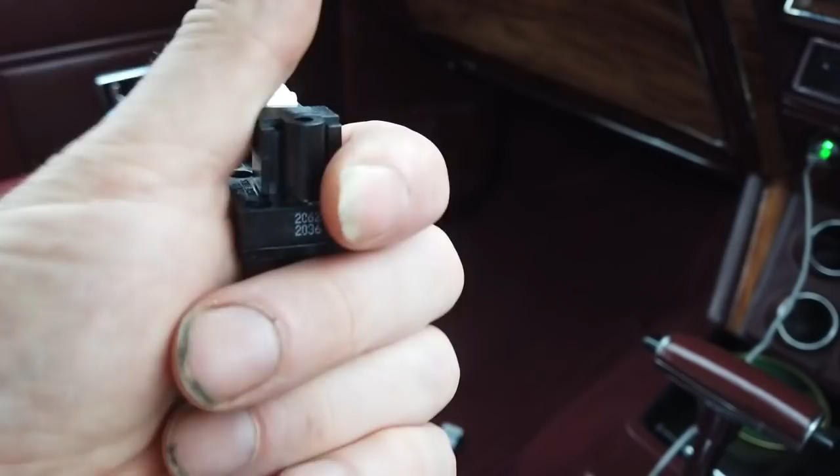This one's adjustable from 6 to 22, I think. Now, the engine should pull about 14 - I think these are HG, Mercury figures I'm giving you, inches of Mercury. Normally it's done in HG, although you can have PSI, can't you, but PSI is normally positive. Anyway, HG - we're hoping that this range, because you can get different ranges of switch, I'm hoping this is the right range, from 6 HG up to 22.

Now, I did put Bramble on the Crypton vacuum gauge, and it showed 15 at idle. So you've got to work out the right point to adjust this little Allen key here on the vac switch, to be at the right position whereby when I'm lightly coasting at about half throttle at 3000 RPM under not much load, this is active. And then as soon as I gas it, or the car wants to drop a gear because the loading's changed, in theory the vacuum drops out. It should follow the tracks of the modulator.

What the modulator does, this should also do, because they're going to be on the same vac line. So what you've got to think about is the modulator - when I boot the car, the modulator senses a drop in vacuum and drops the gear accordingly. This wants to be doing a similar idea. We need to find the sweet spot where this will be happiest without any cycling off and on at cruise positions. Now, I mentioned earlier this is connected to a time switch as well, which I'd already incorporated into the electronics behind the dash of the car.

This is how it works. Okay, I'm going to talk you through how it works as we drive. There's a lock-up light here on the T selector, and a green to go light there. That just tells me it's receiving the microswitch signal, because there's an inhibitor microswitch here. Lockup won't work unless it's in drive. Green says it's in drive. Red comes on when the lockup's completed its circuit - that's when the speed pulses have been counted enough, it's happy that it's in drive and your foot's not on the brake, that red light will come on.

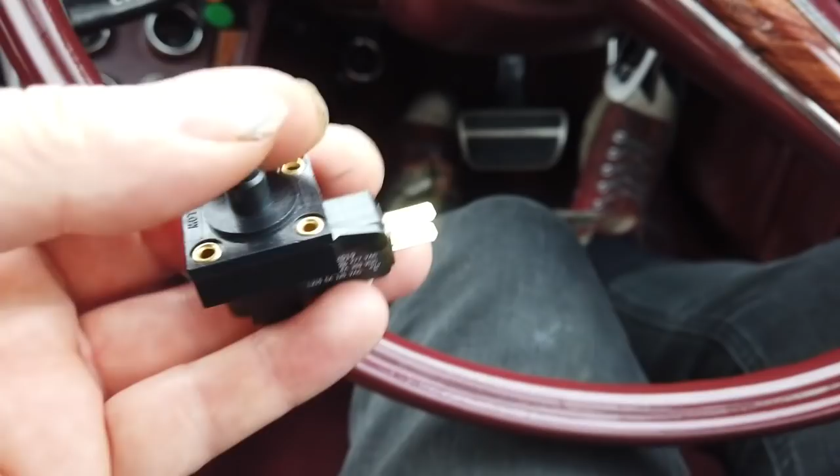If I boot it, the vac will drop momentarily. It does actually come back up as well, by the way. You've got to remember this. But it'll drop, and the lockup will come out, because it'll fire that delay circuit. And that's how we're doing it.

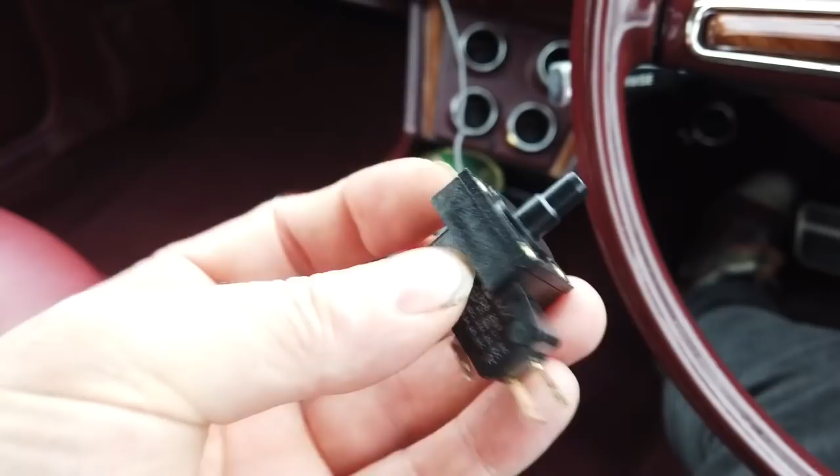I just hope that this is the right one. I'm going to suck the tube end here and just see if I can click it. I don't know how much HG we can suck, but I better ask Debbie from Dallas about that. But I'm hoping it's the right range. I think that it is. At the moment, I'm able to operate that by drawing on it with my mouth. So let's hope it's right. We'll go back and fit that now. Back to base to fit that.

So I've took you out on the road to show you that the power's back in the car. We're not pinking. And it's to answer a lot of those questions which were raised on the last video about induction noise. I'm thinking perhaps the induction noise is something to do with the fact it's so well insulated in this cabin compared to the other cars, because you'll notice it is exceptionally quiet when we're driving.

All I've got to do now is... the phone is locking in and out. I've got a Nokia C1 phone here. Look at this. Great phone. That's all I need in life. I don't want any more. Don't want no smartphones. Don't want any of this scrubbing screens. I just want rough, ready, good to go. This does pictures - there's my cats. This does texts. It does phone calls. It's got a camera on it. I don't want any more. I don't want some smart-ass thing. Now, there's a downside to it.

This one's got a fault on it, but I'll get another one. The Bluetooth range on it - probably the Bluetooth transmitter's damaged - so it doesn't pick up my hands-free car kit. But if I put it next to the Bluetooth module in the glove box, it'll pick it up and you'll hear my Parrot Bluetooth lock onto it. So that Nokia phone is great, but that particular one's got a little Bluetooth fault. In fact, when I'm using my Bluetooth headphones, there it goes, it's got it. They don't lock on either. It's not the car kit.

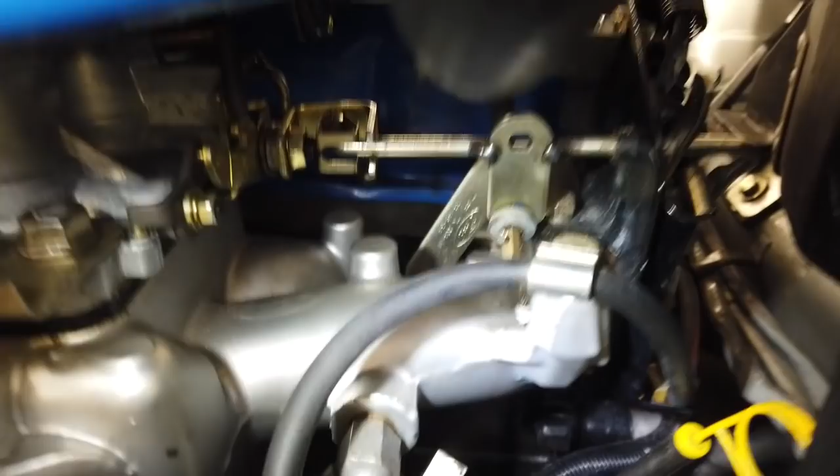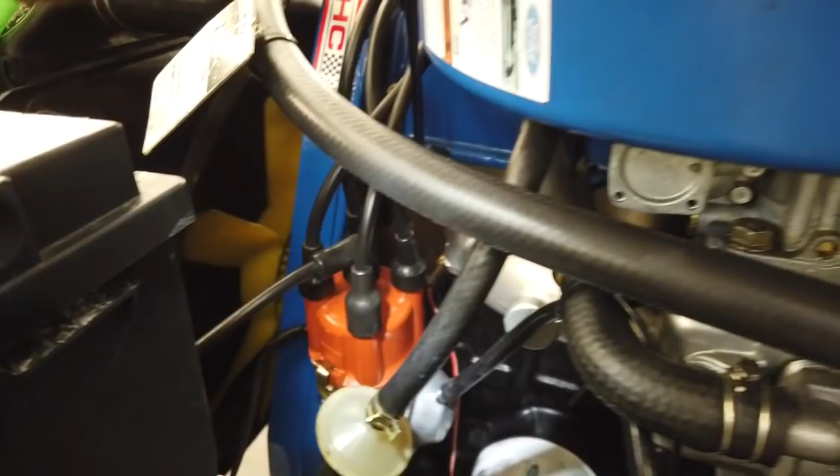Okay, we're back at base after that trip out to pick up the Vac Switch and test some of the improvements we've been doing. A vac line is now attached to the inlet manifold T or Y adapter—it's a triple adapter actually, feeding the brake servo, the vac modulator for the gearbox, and the advance vac to the distributor. So I've got 3 things connected now. As I said earlier, the distributor didn't used to be connected to that. I've blanked off the pickup on the ported side on the carburettor, so it's picking up off this T-piece now—you can just see there, it's a triple T-piece. The pipe now comes over the wing onto the floor, then up onto the bench here, and this on the bench now is what we've got.

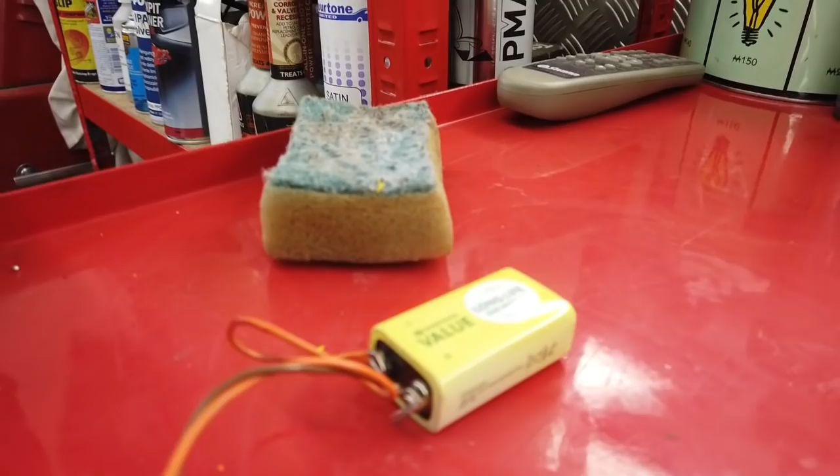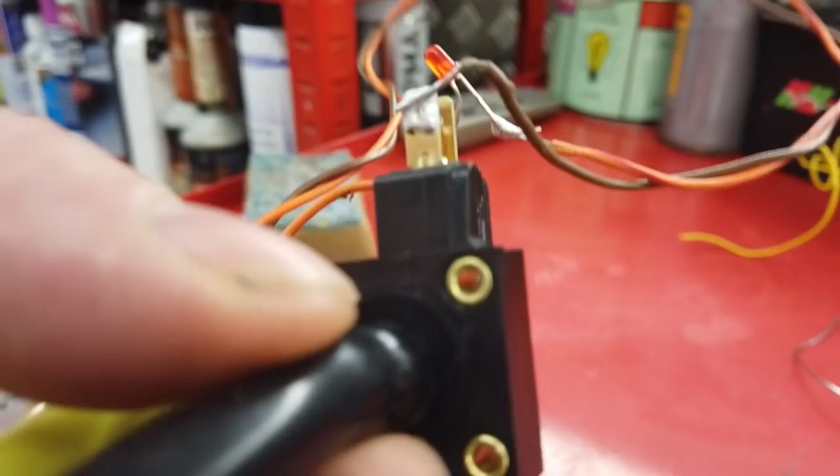Let's turn that light off to connect the Vac switch to—a little battery here and an LED. The idea is I can sit this in the car and then monitor it under load conditions to see if I need to adjust the switch. There's a little Allen key on the pipe connector inside it, which you can rotate to adjust the sensitivity and the range of this vac sensor.

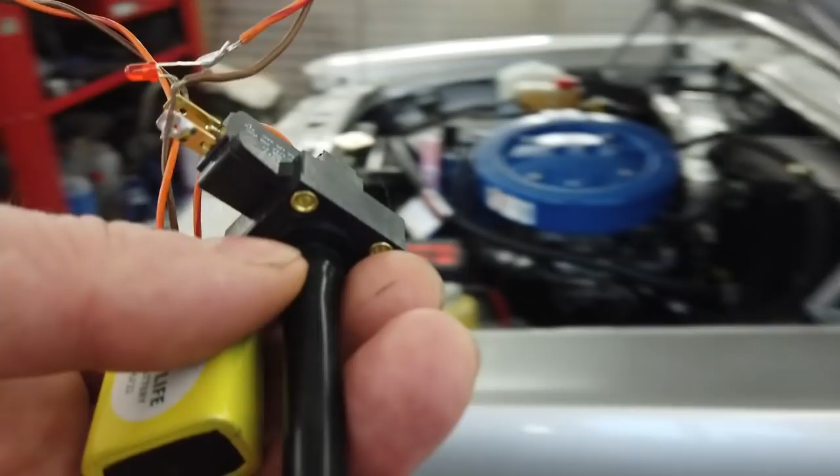So that tube—we'll have to wind the window down on the passenger side and place this in the car, try and get it so the bonnet doesn't nip the tube, drive down the road and monitor how this dips in and out. Before I do that, I'm going to have to put a T-piece into the line because we still want the gearbox operating on the vac mod. At the moment we've pinched the vac mod hookup point just to initially test this.

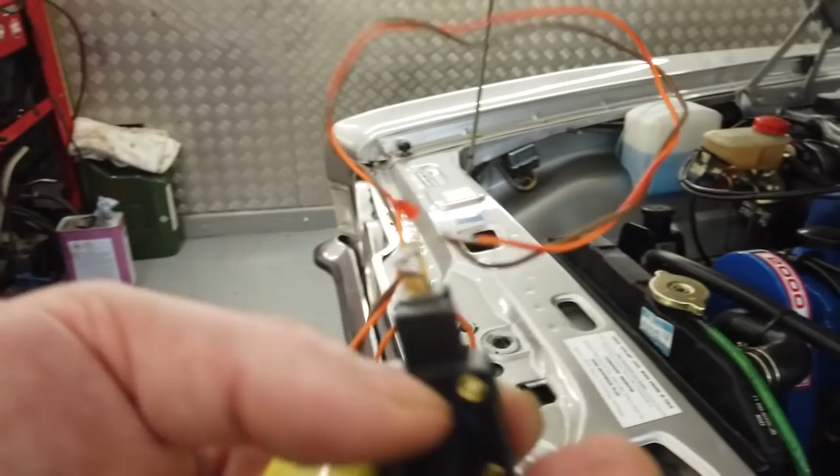Also, I connected the car to the Crypton's vac gauge. We were getting 16 right the way up to 25 vac, maybe beyond. It was certainly high on the engine. When we revved it and blipped it, we were able to see that gauge move around, and indeed I've had it running on this now as we stand, and it does drop in and out as you blip the throttle. So it's looking like it's initially in a workable range.

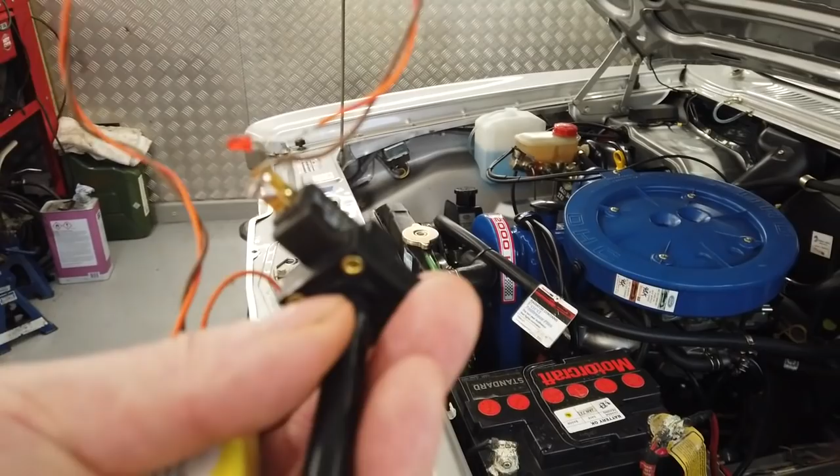It's switching on now as the engine starts up. When I blip the throttle, the LED goes out, comes back on pretty quickly—so it's just how quickly it comes back on. I'm expecting things to change when the car's under load conditions. I think it's very difficult to test this when the car's static. From what I've read, the vac is seriously affected by the loading of the car, which is what we want, because we want this to be dropping out when it's all loaded up, and only when you come back off the lighter throttle and the car's a bit more free and cruising, that it then dips back in.

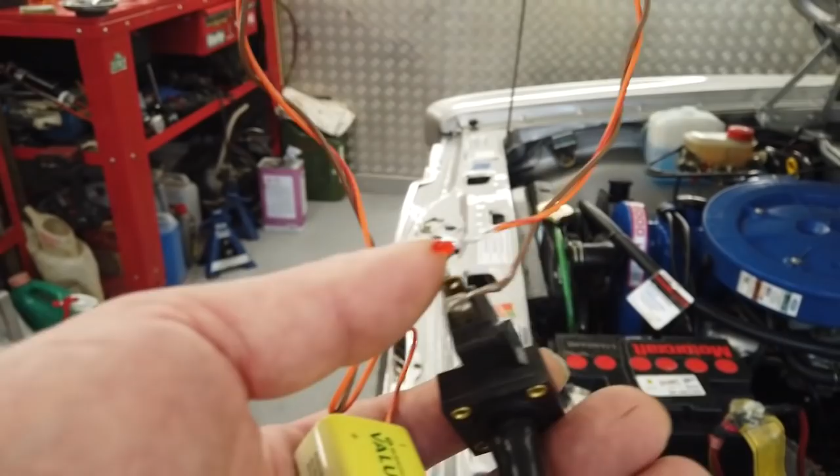So we're hoping that this LED will give us an indication of that dynamic as we drive. We should see this LED staying off quite a lot when the car's trying to get up its speed, and the gearbox should drop down appropriately to try and get the car up to the speed that you want, and this should try and sort of catch it up. They should work together—it's a known technique to do, so it should work. People do this, and the kit is out there to do exactly what we're doing, so there's no reason why. The only thing we don't know is the exact adjustment of this to get the lockup on when we're at the right cruising conditions—that's the only thing we don't know. So we're going to need the Allen key, and bring it with us.

There's a little Allen key here, and we'll take that out, mess about with it. I can only really go on the dual carriageway, which is limited to 50 at the moment—there's nowhere around me locally where I can get to 70. It's a long haul to the motorway. We'll see. What we're going to do now is put a T adapter on this line, poke this through the passenger window. We're going to have to put up with wind noise because we need it on our lap, really, or visible, and then we can see how it performs and what actions happen under these load conditions with the vac.

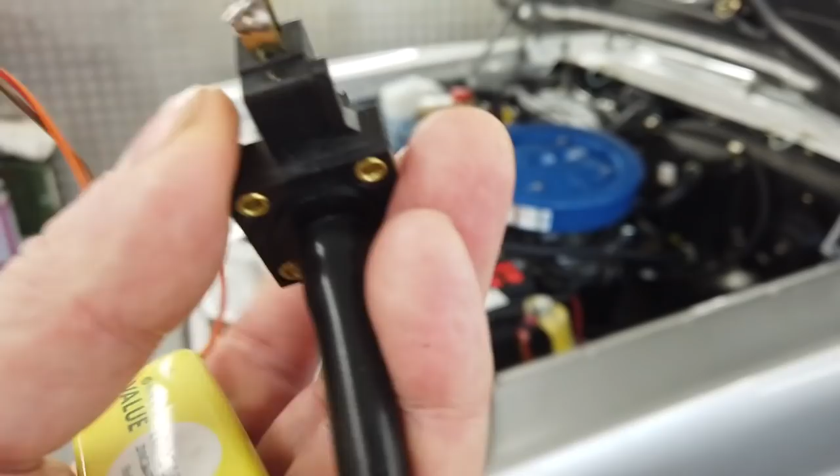If that all checks out good, we go under the car and fit this by the gearbox. There's already a loom ready to receive the inputs from this, as I'd planned ahead, just that I've never got round to installing this micro switch before. So the loom is there under the gearbox, two wires which simply join together and initiate a timing circuit which drops out the torque converter lockup for 10 seconds. This micro switch will be triggering a series of 10-second delays which will stop it chattering off and on.

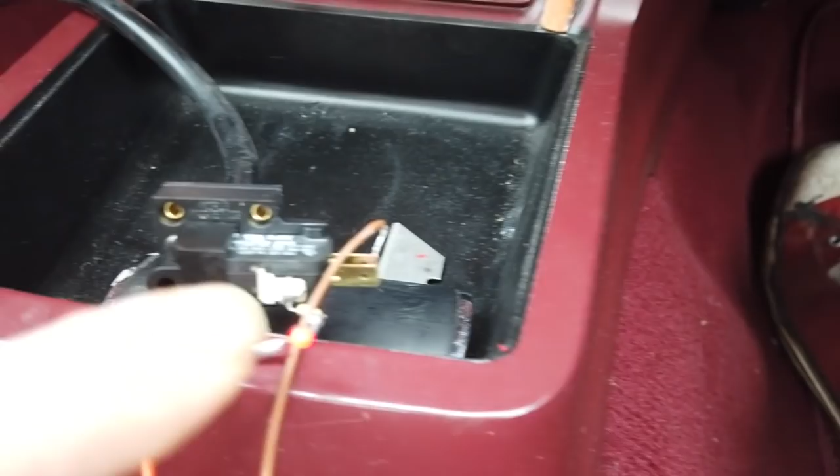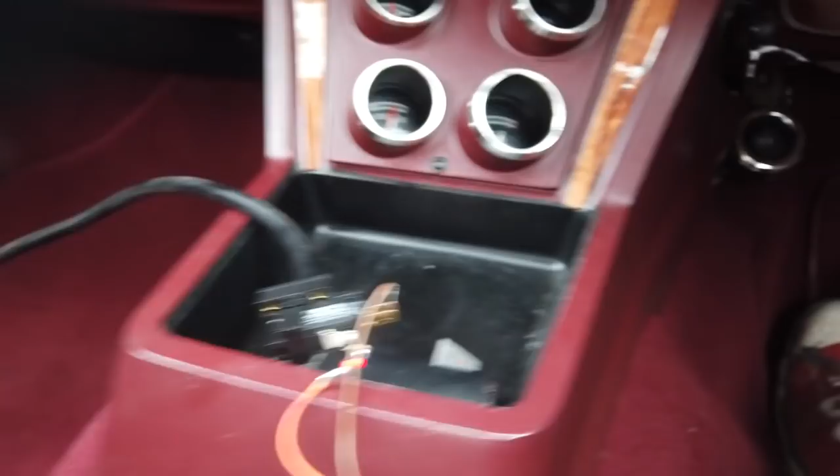Okay, I've hooked it up just in the centre console. I don't know if you can quite see the LED on there, but it is on just there. So we're going to drive. By the way, I'm looking forwards, I'm not looking at that, I'm listening for it because it clicks - you can hear it. So you can hear it clicking there as I load the engine up. That's how we've set it up.

There we go, set up like that. If you can see it, just on the edge there. So if we load it up, you'll see it click off. There, it's off now. Let's see what happens when we get up to 50. It's still off.

On now at 50, so it would work at 50. So it's going to work at 50, and even if I drop down now, once it's reached the actual speed and it's not loading anymore - in other words, when you coast it doesn't drop out. It's just dropped out then as I've put my foot down again. Now, it could need a little bit of tuning.

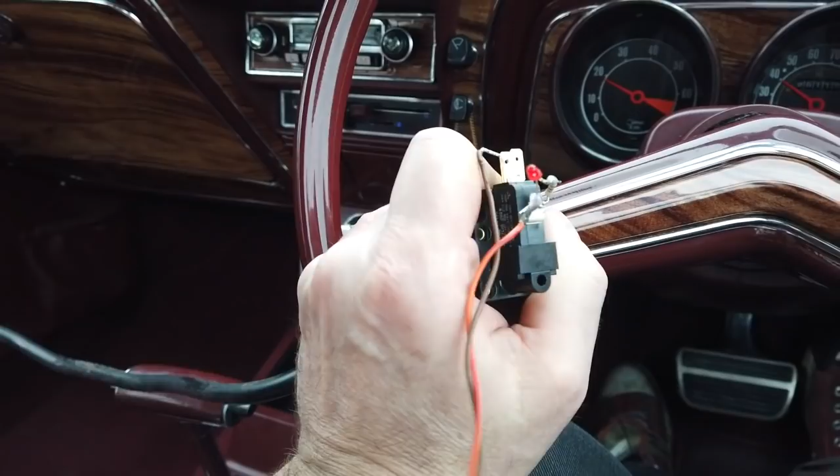It is responding to throttle input, so it's doing roughly what it should, everybody. Bring it up to you - there, got it in my hand, look. Doing what it should: off, on, off as I blip the throttle. Gearbox changes down okay. Back on as we coast. Off. So around the 50 mark it's okay.

We need to get it to work at 70, so it may require a tune to get it to work at 70, because I'm going to need extra throttle to maintain 70, and that extra throttle might be too much to not let it trigger - it might be too much vacuum drop for it not to trigger. So really there's no way around it except finding a road we can do 70 on, which means unfortunately it's going to mean the motorway, but looking good so far.

Okay, I've pulled in, I'm ready to adjust it. It works alright at 50, but if you try and get to 60, the new throttle position to maintain 60 mile an hour won't allow enough vacuum. You can just see it lit up at the moment because we're stationary. Hold on, let's get it in view. There we are, because we're stationary. Battery just on my lap. There. Battery just on the lap. Unit just there.

So I've got to take the vac tube off just here and alter this now till it's less sensitive. It's too sensitive to throttle input, needs to be less sensitive - needs to be a bit more of a boot to get it to cut off. So we're going to turn the screw. I don't know which way is less sensitive, so now it's trial and error time. Here we go, trial and error.

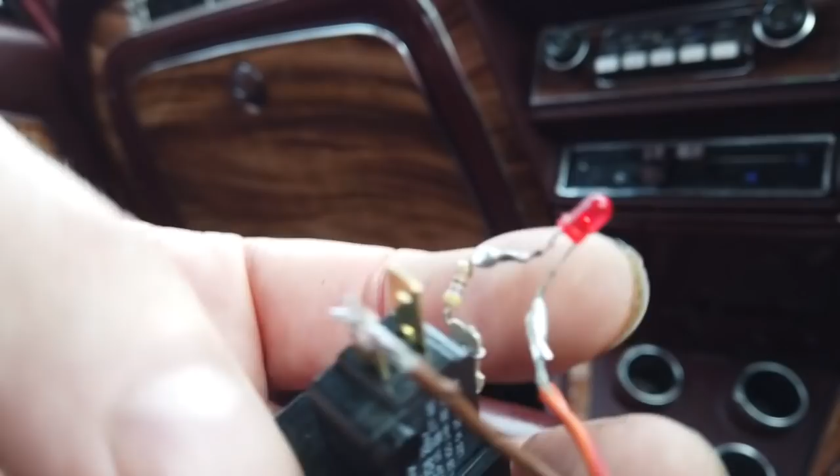Okay, I've pulled in, and two turns clockwise creates it even more sensitive. So we're going to have to go 2 back and then 1 - so 3 anti-clockwise now, and we should be heading right. So we know it's anti-clockwise that decreases its sensitivity. At the moment it's very sensitive to throttle input, so we're going anti-clockwise. So we just place - this is the tool I'm using here, just a small Allen key setup on the end of one of my adapters there.

So I'll switch off because it'll - well, it doesn't stall it, but it makes it run rough if you don't have the tube on. Let's turn that out on the road again, see where we get. At least we know which way we have to go.

Wow, an old Escort van, a Mark 4 Escort van just went past. Wow, could have been a Mark 5 actually.

Okay, we're hooked up, that's looking better. So when I say turns, just in case you're doing this, they're hand turns - that's classed as a turn on my ratchet, by the way, like that. So I've gone 5 now, and it holds up to 65. I have to watch it because of the average speed cameras. Okay, but I'll show you as we drive. You're going to get wind noise, so you just have to watch the birdie. You probably can't see the LED - it is only a 9-volt battery there.

Out we go. I can feel it in my hand. I'll shout because of the wind noise for you. Still in.

Still in there. I want it to drop out under load. Let's see what happens. Dropping out there now under load. Dropped out. Back in.

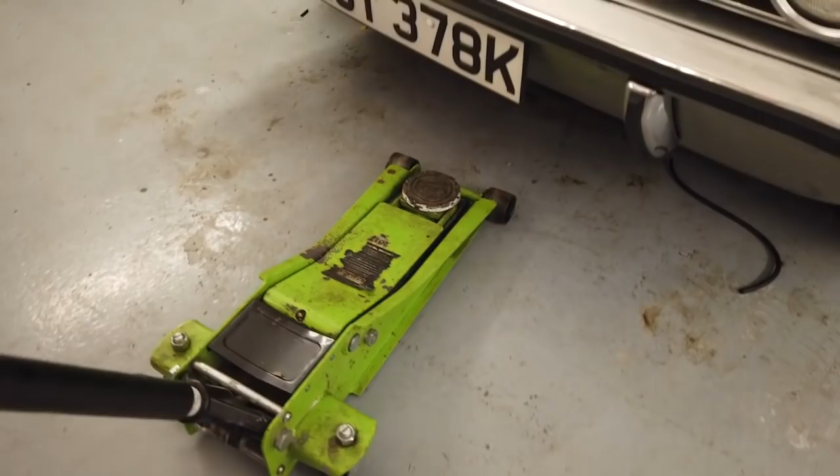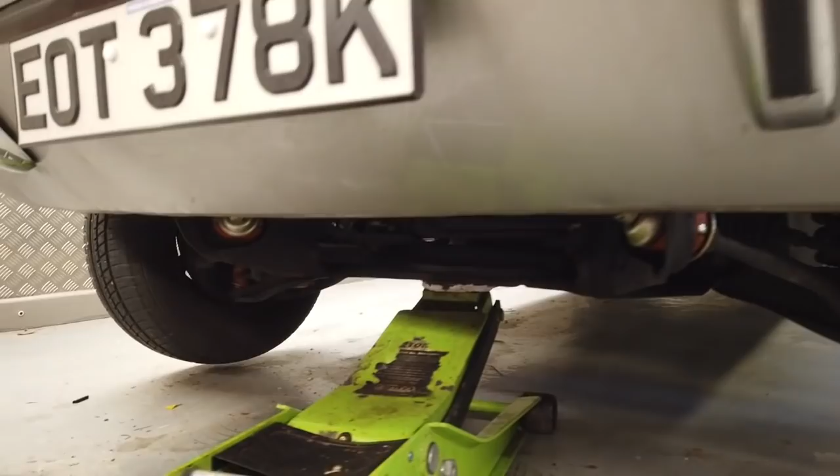I always jack from that point. Okay, I'll get you underneath the car and show you where we're going to hook up the vac control switch, torque lockup, and then we'll go to the whiteboard. I'll run you through a bit of schematics, a bit of a tech lesson, so you know exactly what we've been up to on this tech video.

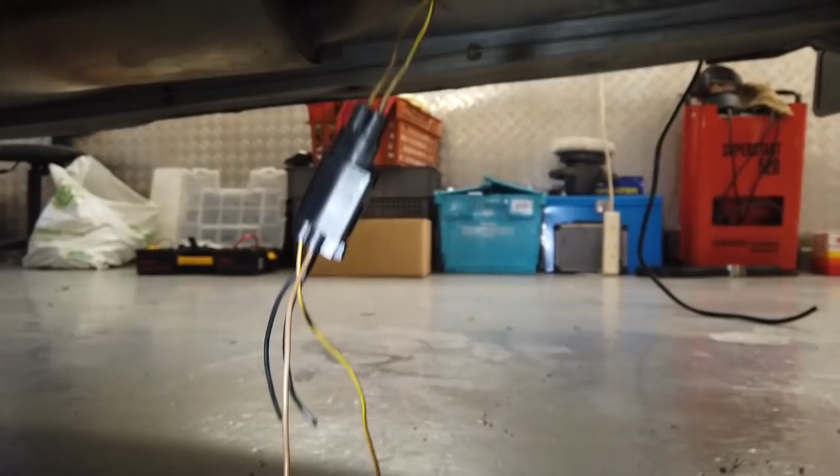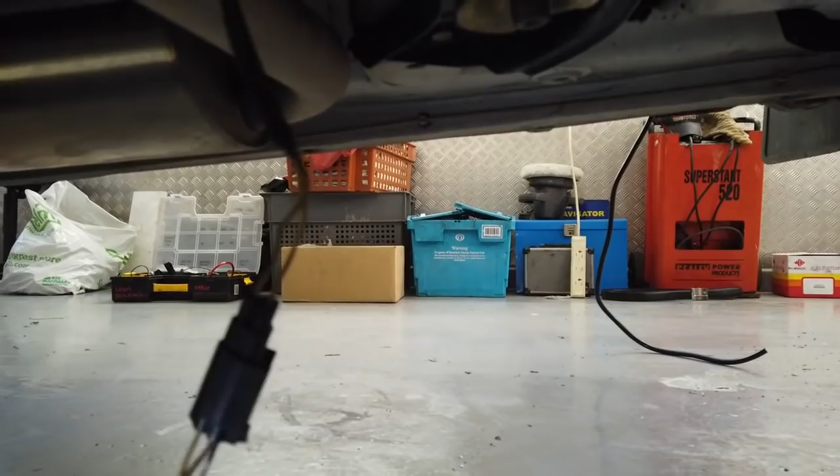I'm under the car, and I've just put the other connector into it. It was dangling under the car with just one side ready, so I didn't have bare wires. I've plugged into it, so I've got to make a loom now into that socket. It wasn't dangling down, it's held in a little clip just up in the gearbox, a nice clip that holds it.

Okay, if you can see it, the camera's being a bit naughty. There we are. Somewhere under the pan was the little clip holding this plug in. Down we go again, there's the plug. So that comes out, I have to use two hands to unplug it again.

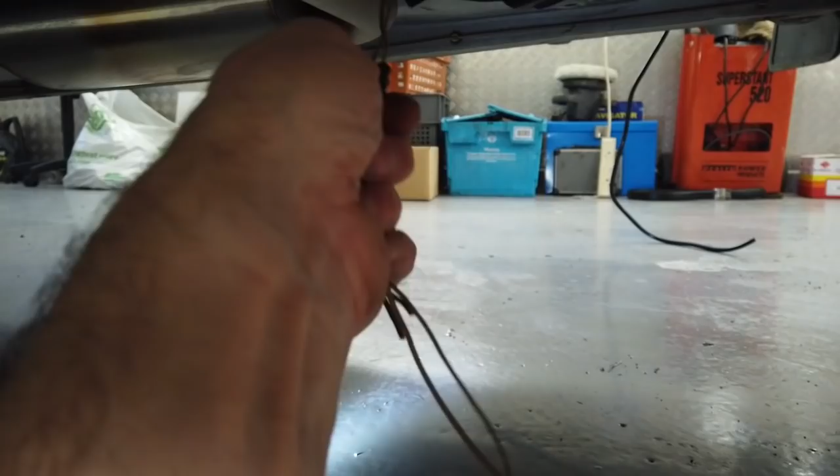Then we build a loom enough to reach the vacuum switch, and the modulator's just on the side of the box. Let's get you into the modulator. There, you can just see it.

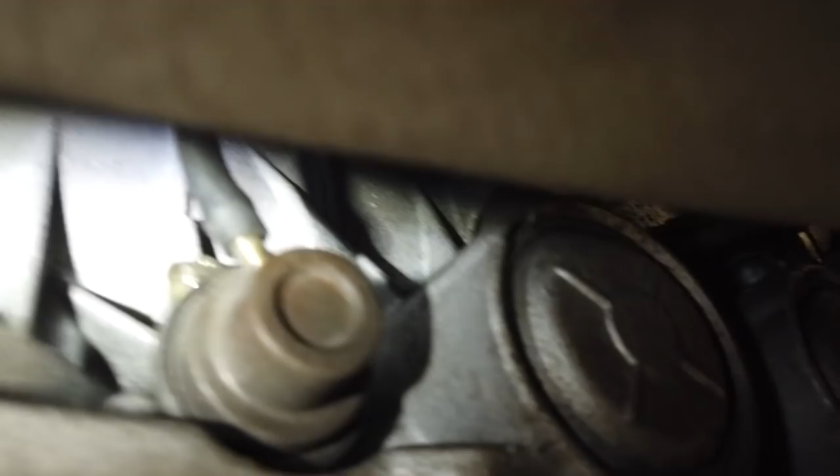I'm going to tee into that and find a convenient place to mount that switch underneath here. Let's do that next. Back to the bench.

The thumb wheel is counterintuitive, you press it one way and it goes the opposite way you think. Right, I think you can set that. Back to the bench, let's go.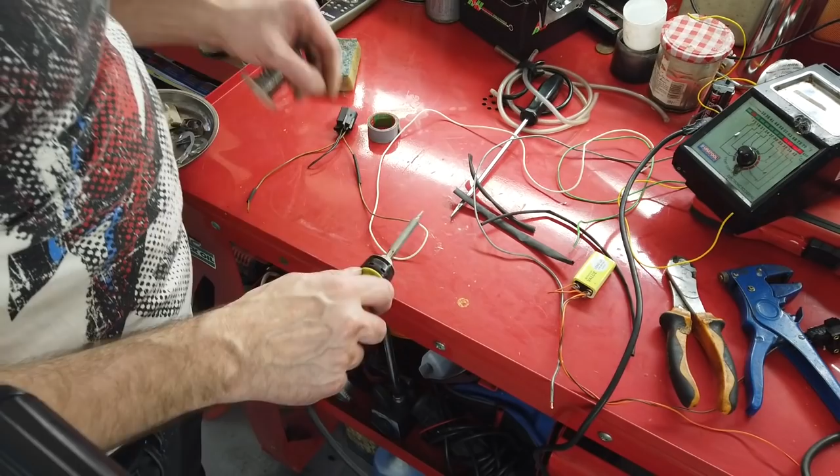Okay, soldering iron's ready. I'm just building this loom, so I've got to extend the cables a little bit. I'll do a join here and heat shrink over it.

There we go for this. Then we'll do a little loom wrap on this to get it looking neat, using Ford loom tape, of course.

So that's soldered there. Slide the heat shrink over. That gives us one.

Sometimes you can pick a heat shrink that's just a little bit spiky there. Let's trim that a bit, trim that little spike off it, and slide that on. We'll just trim that down.

You can see what I've done, just push two wires together, solder, but it's a little bit over. Got two to do anyway.

Do this one next. For these, keep it flush with the heat shrink and push them into each other, then squeeze them and solder them.

Usually works. That one, as I say, made a spike, a little jagged bit of wire sticking out. We just trim that down. There goes another.

Let that cool off, just get the side cutters, cut that little rough edge off this one so the heat shrink will slide on. Like that, and he cuts it.

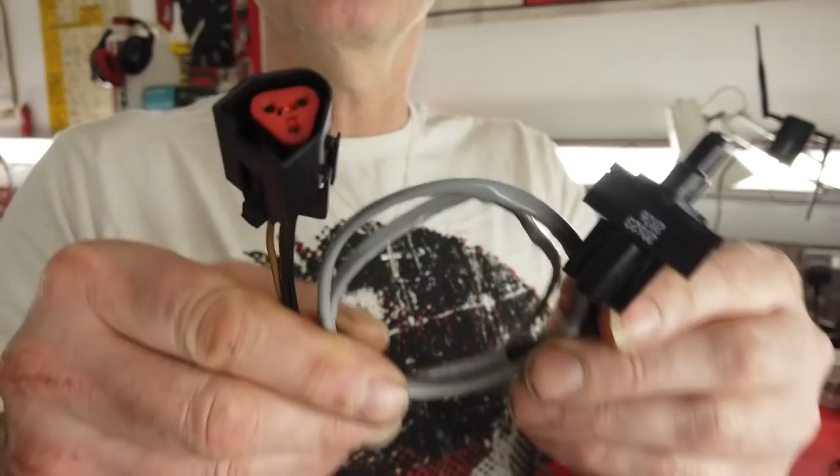Okay, our loom is nicely built, you can see that there. Vac switch at the end, plug at that end, and the Ford grey loom tape just to keep it looking as factory as we can.

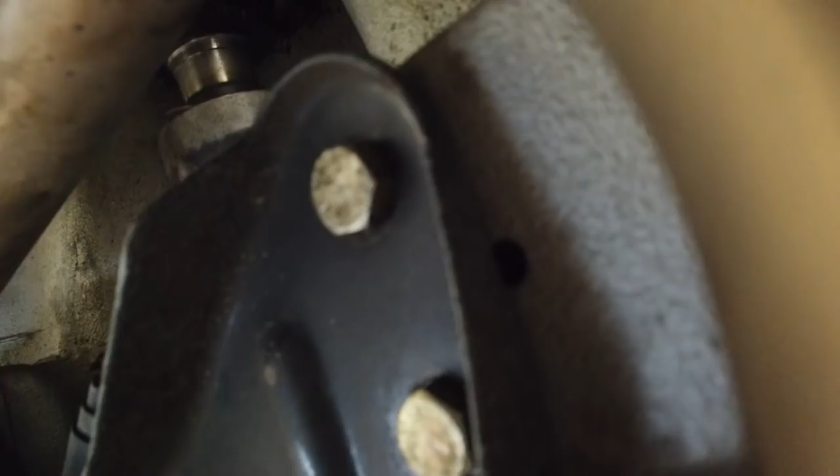So there you go folks, you won't be able to see it there because it's tucked away neatly, but there's a little shelf there, and I've zip tied up the sensor so it's nice and clear and protected there and ready to go.

So we're ready to test. We're all fitted underneath the car and we're ready to go now on the road and just see if that does what it's supposed to have done.

Out we go. It's all fitted, loomed in, zip tied up, reasonably weather protected on that little shelf of the gearbox. So let's make sure we're connected under the bay. I think we are, back onto the T-piece connector.

Yep, right, we can go out, see what we get. Road test it now.

Guys, girls, we are on the road and testing. That red light you see there, just by the T-switch, is the lock-up light, it's on. So it should go off when I cane it, or press the brake.

At the moment we're just under 40 mile an hour. Just under - if I drop any lower, it will drop out. If I accelerate, it should drop out too. At the moment there's a lot of traffic around, and it's dropped out on the acceleration.

It's worked. We're in, back on again. It's worked, we're in, we are running. Folks, we've done it.

All you've got to do is fine tune it in case it's not quite in at 70, but we think we've got it. If not, it's just a little turn on that screw anti-clockwise. That is it, overdrive is on. Test the brake - brake kills it, revs go up a little bit. Lock up, I mean, not overdrive.

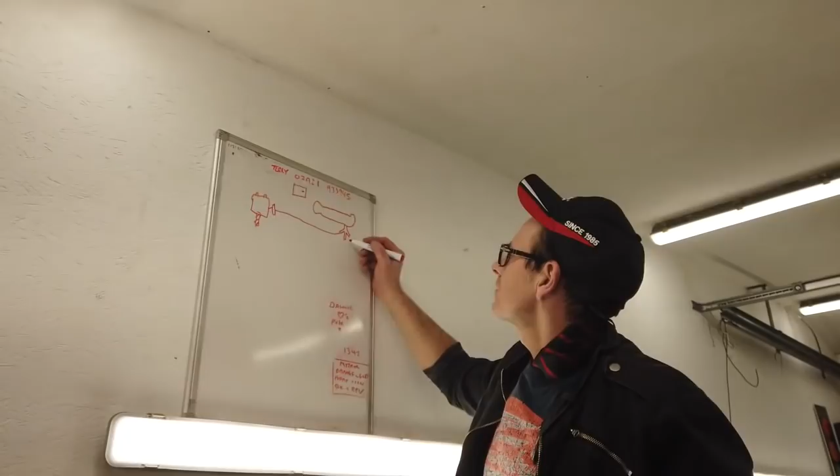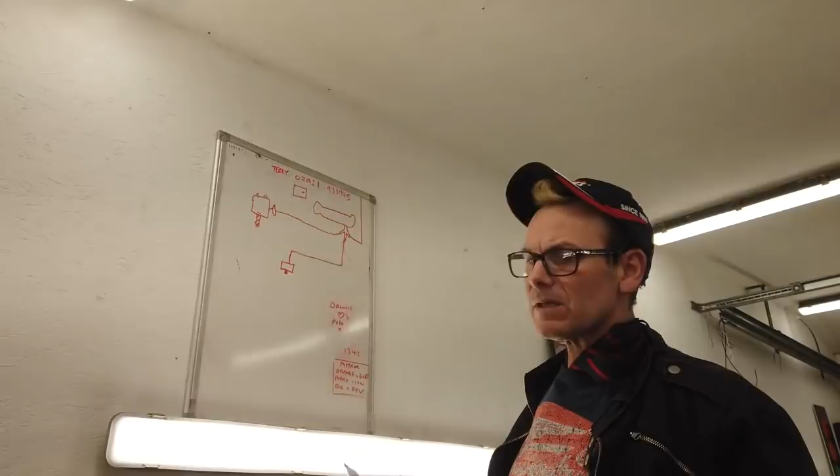Another outlet on this T adapter is going to the gearbox, and the other one's the brake servo. So forget the brake servo, this gearbox one's what we're interested in. It used to go directly to the gearbox modulator. Now the modulator is again another vacuum device. I've got one in here. Hold on, let's get a modulator out. I did have one in here. I haven't got one in there.

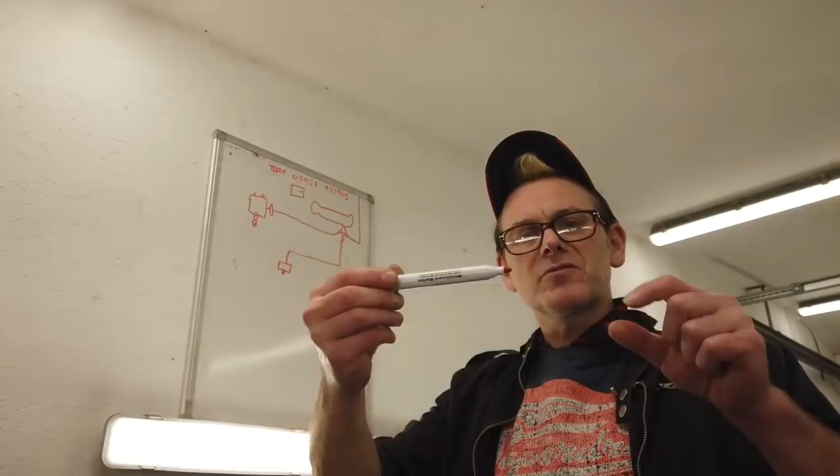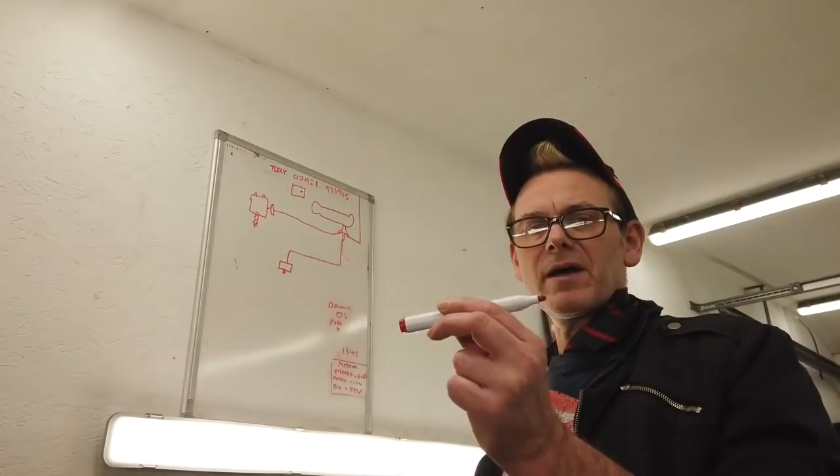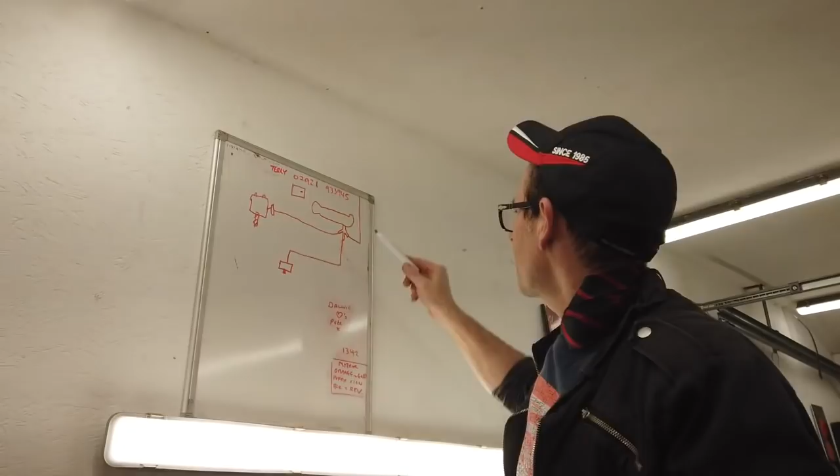Okay, the modulator is a vacuum diaphragm and a plunger. Basically what happens is the more vacuum, the more the plunger will move. It can be pressure spring loaded and then the vacuum releases it that way, or they can go and push the other way. Mostly they pull out, but they can be built differently. So anyway, whatever happens, the vacuum from our inlet manifold connects via this tube down to the side of the gearbox, and a plunger moves corresponding to the engine load.

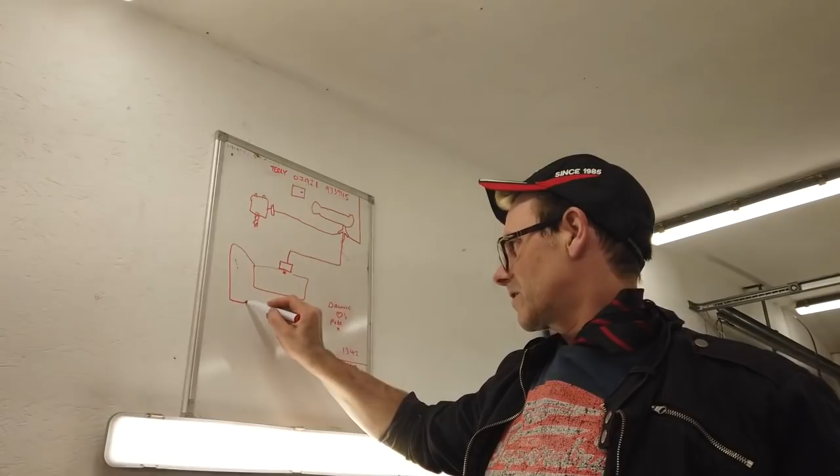So if I accelerate, this rod is moving with the vacuum, because the vacuum varies with the engine load. So engine load makes this little rod at the side of the box, which is connected by that rubber vacuum tube into the engine bay, move left and right. When it does that, it alters the pressure inside the gearbox, the pressure rail inside the gearbox. We won't go into how that works, because I don't really know. There's the gearbox. But it alters the pressure rail, which changes the way the gears up and down shift.

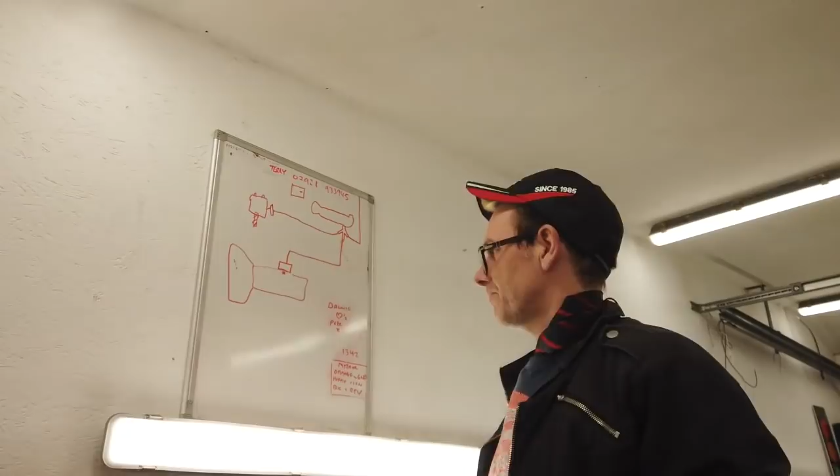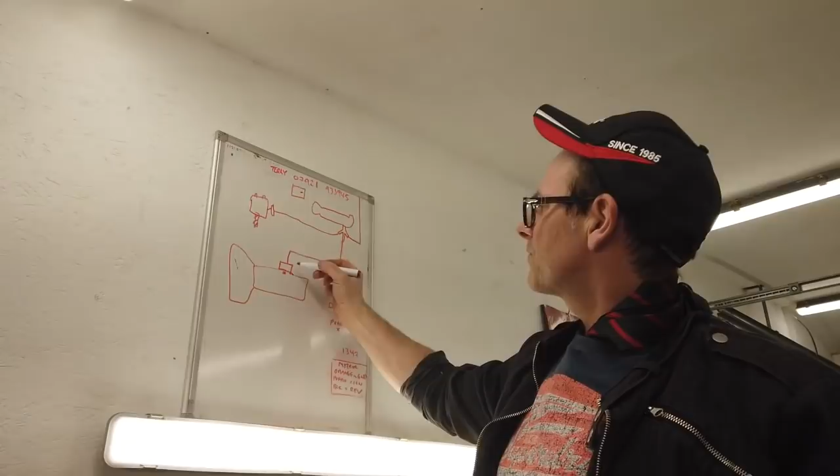So what you want is, when you're loading your pedal up, you want those upshifts and downshifts to correspond with how you're putting your foot on the gas. There's other factors, of course, the speed that the box is rotating, that's governed internally, but you can more or less dictate the way the gearbox behaves with that regulator. Some are adjustable, others are fixed. Mine's fixed. That was working all right, so we didn't need to worry about it.

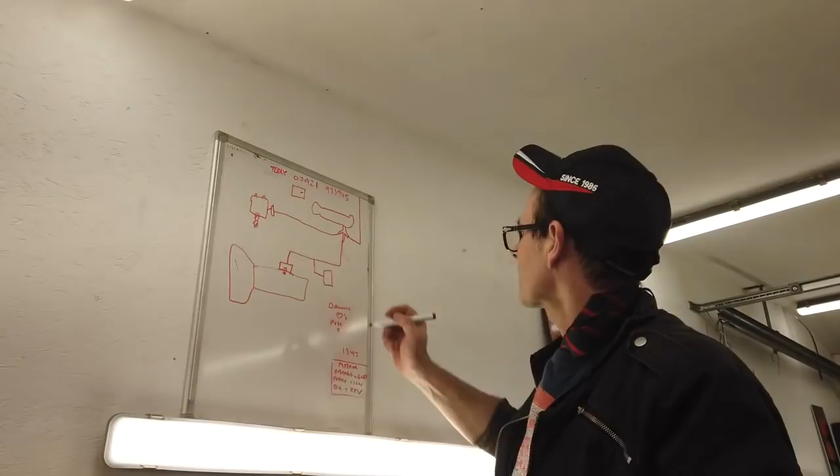But what we did need to do is tee into the vacuum pipe, because we needed another outlet. We needed one to operate our vac switch, which you saw me go and pick up. The vac switch is again a sort of diaphragm plate, a circular diaphragm plate, moves with vacuum and presses on a simple micro switch. So you have that micro switch there, just at the side of the vac switch. And what we found is we adjust the vac pressure switch so that it works in the range that we want. When we're putting the pedal down, we want to use this vac switch to disengage the lockup.

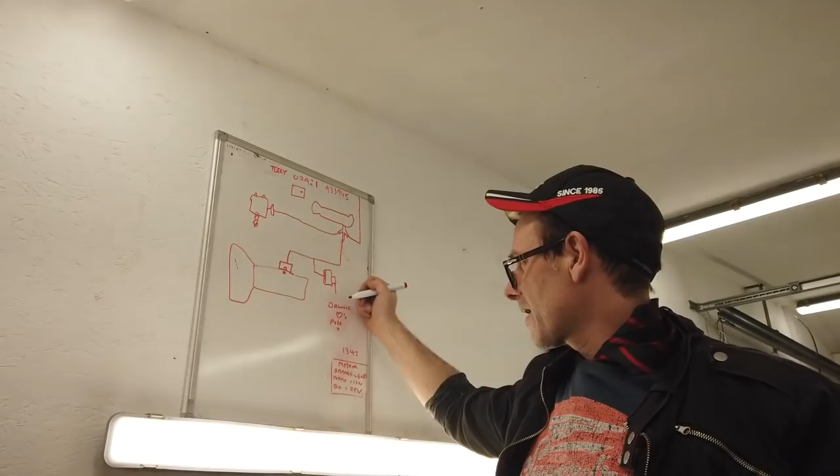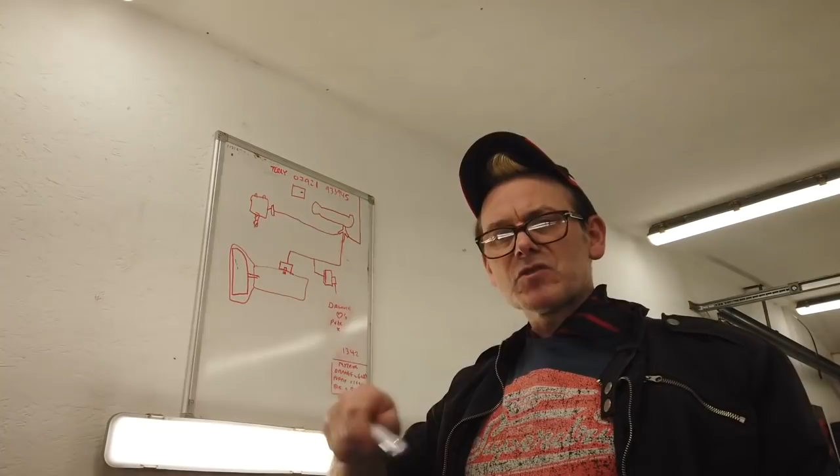Now then, you might ask, why disengage the lockup, and what is the lockup? The lockup is the torque converter that fits inside your bell housing, which controls the power into the gearbox. Older torque converters just run on as a free running torque converter, and at cruising speeds you lose a little bit of power with a torque converter because it's slushing itself round when you're at cruising speed, and you get a bit of heat generated from that and a bit of power loss just by the nature that it's an auto, and it's a centrifugal design where it's spinning round, all the fluid spinning round in the torque converter. They're good, but you lose a little bit of efficiency when you're doing a long cruise on them through heat loss and friction losses.

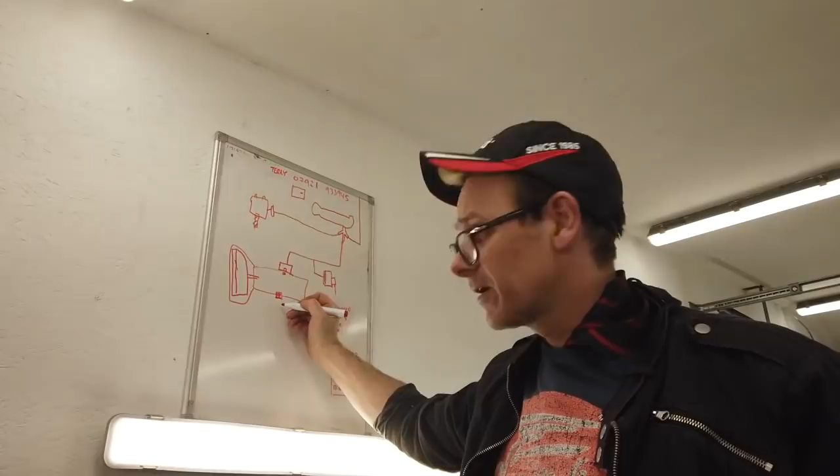What they came up with might not be a new idea, but it was starting to become popular later on, certainly early 80s, mid 80s at least. They came up with a solenoid pressure operated clutch plate, which makes the torque converter become a fixed clutch plate. Inside it, it's got a clutch plate controlled by hydraulic fluid, and there's a solenoid valve on the side of the gearbox. When you apply 12 volts to it, it routes fluid into the side, and quite cleverly, it goes inside the centre shaft of the torque converter where there are channels drilled out, forcing these pistons to push a clutch plate.

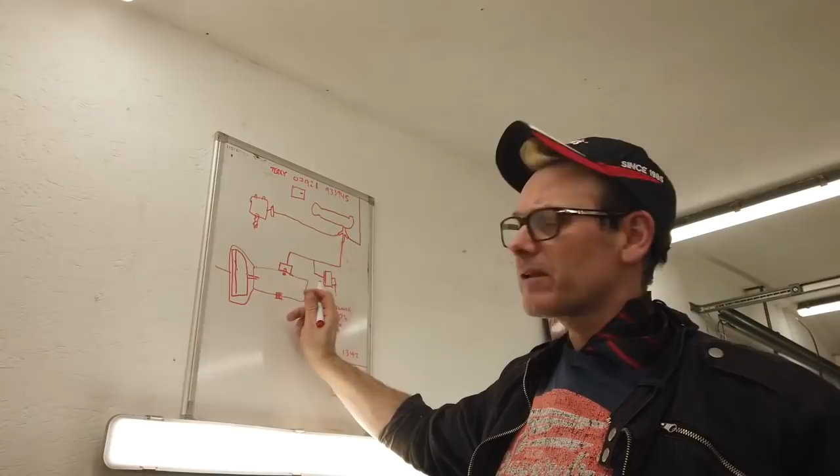By energising just a simple 12 volt solenoid, you lock your torque converter up, so the drive from the back of your engine is directly through into your gearbox, more or less. There could be some slippage on those plates, but it's more or less all the way through, giving you a 5-speed efficiency gearbox. So that's what it does.

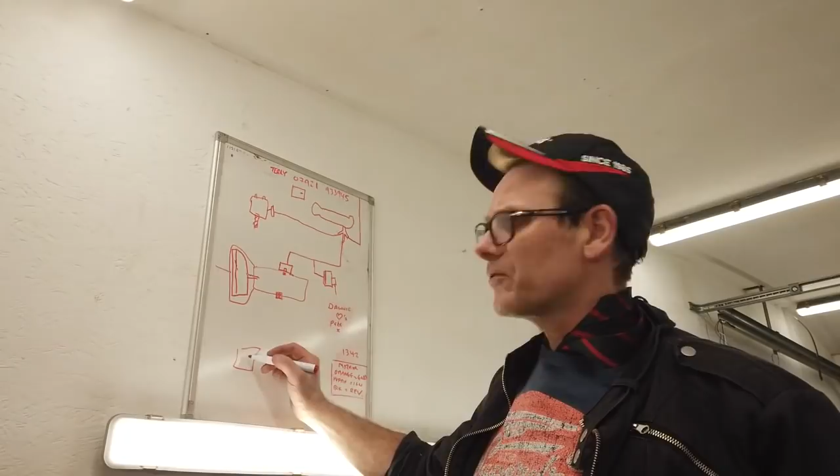You need to control it though. There are times when you don't want it on, especially at very low speeds, because it tends to try and stall your engine, much as it would happen if you rolled up to the traffic lights with your clutch out and still in gear. So at low speed, you want to drop it out. I built a speed controller which, under 45 mile an hour, will disconnect the power to the solenoid. It won't work anymore, so it drops the clutch out.

This speed sensor controller is something I've built electronically, measuring the speed inputs from the speed sensor, which is also used for cruise control. I've got an electronic box which stops the lock-up plates from working unless you're going over 45. They also won't work unless you're in the drive selector position on the gearbox - that's done with a little micro switch on the T-switch fitted there. So you route that wire through that T-shifter micro switch, and it's got to get through that and receive the speed signal of 45 mile an hour. So there's two things already stopping it from working - what you'd call a truth table.

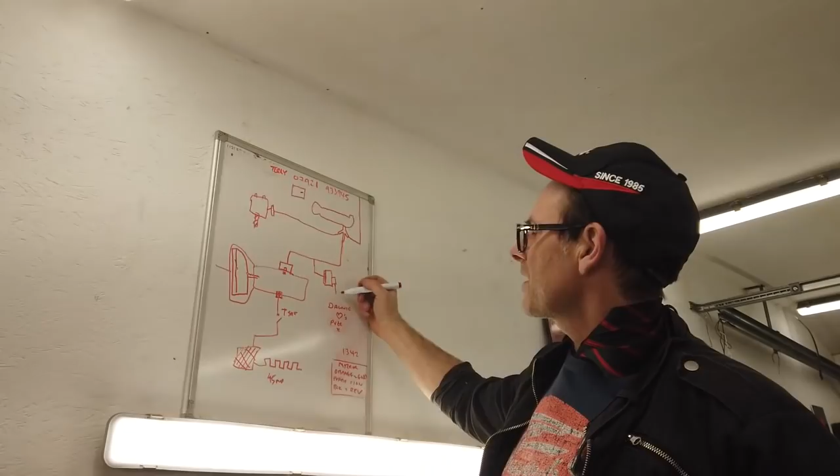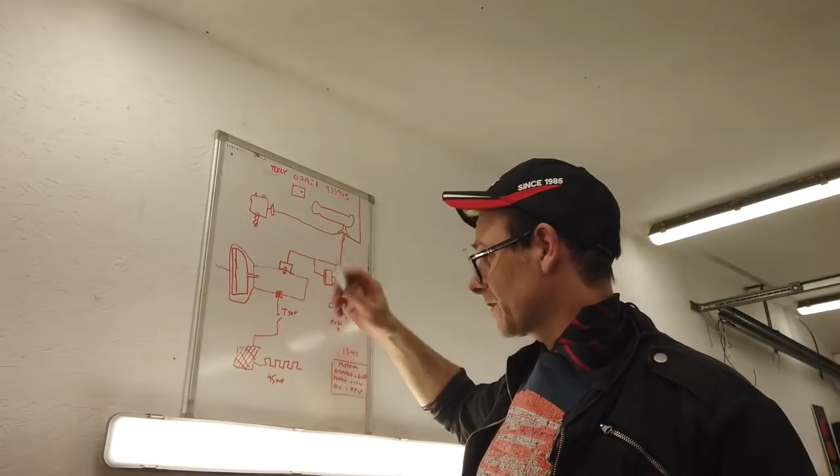The other thing that's going to stop it from working is the vacuum level. When we accelerate, we'd like the clutch plate to drop out for a while so that your torque converter can spin up and give you a bit of torque multiplication. You'd lose that if you were locked together. That's what's happening when we get that surge between the gears - that's torque multiplication coming into effect, and we don't want to lose that. So you come up with this vac switch which detects that low pressure on the inlet manifold and flips the little micro switch across, which also interrupts the circuit.

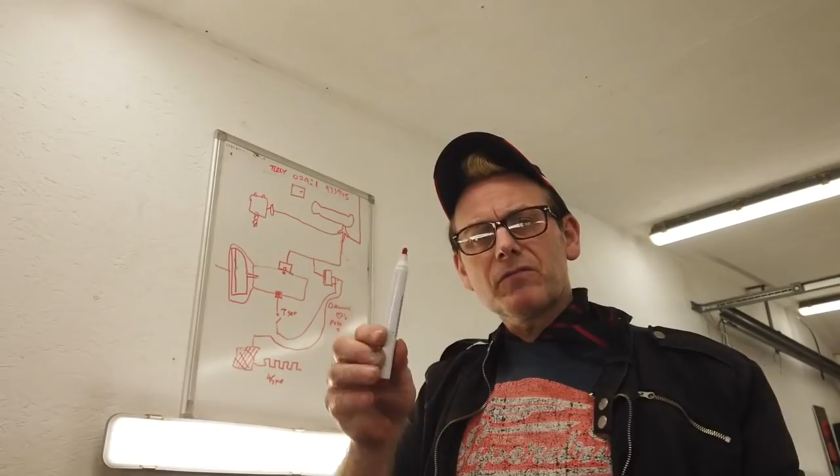So it has to get through three things now - three little routes it's got to go through before it will work. Only when all those are satisfied does the lock-up come in, and that's how you control it. Now, one problem occurs: at a certain throttle position, thereby a certain vacuum position and loading, you can get a point on these vac switches where they chatter, because they're right at the point of being off and just at the point of being on, so you get this chattering going on. So you've got to damp that out.

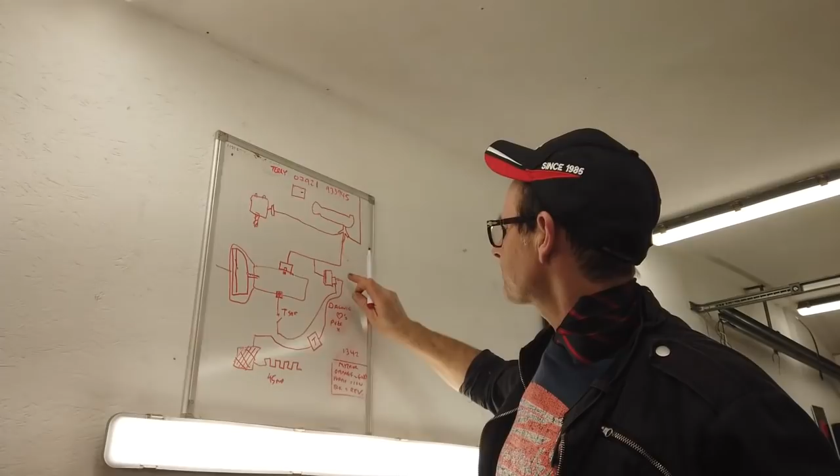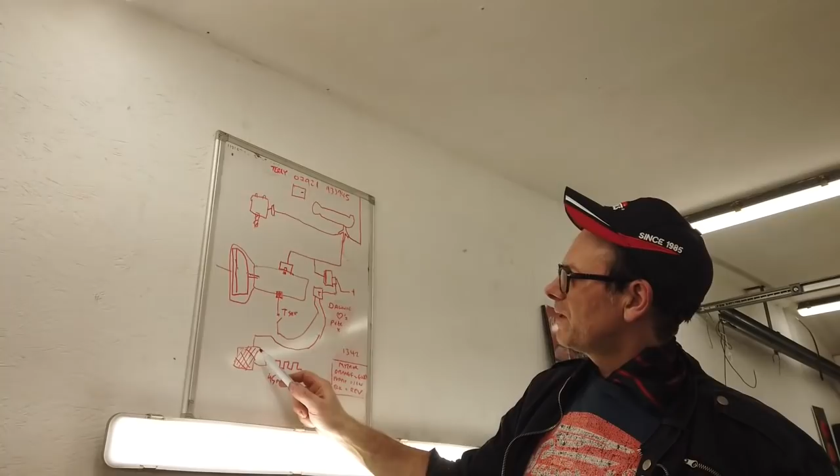So what you do is make it so the switch controls a little time delay circuit, set for about 10 seconds. So when the micro switch operates, it actually operates a time circuit - this circuit's actually drawn wrong if you want to be critical about it. This micro switch no longer interrupts it directly, but controls a timer switch instead. So this is a positive feed to the vac switch going to a timer module, which then has the contacts that interrupt the feed. So you're going out of your speed sensor, through a timer, through the T-switch, and then there's one last obstacle it's got to overcome - the brake pedal, which also activates the timer.

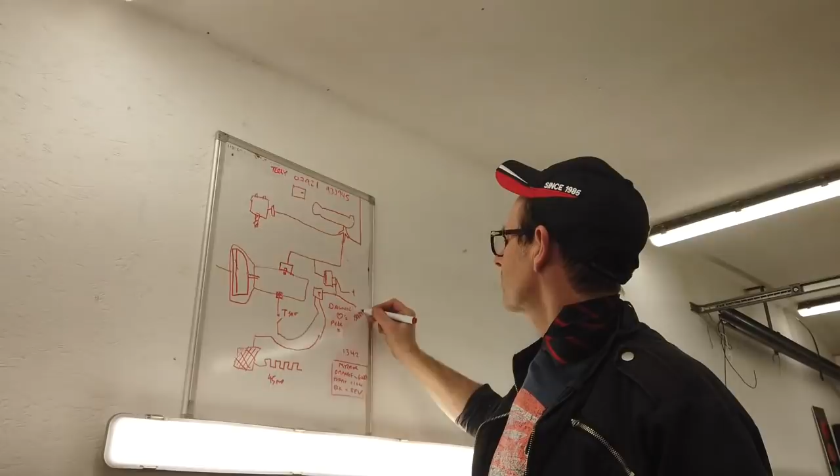So I've got a brake pedal, and that's a positive feed to it. The brake pedal gives me a positive signal which switches the timer circuit on. The Vac switch also gives a positive signal which switches the timer circuit on for 10 seconds. For those 10 seconds, the contacts inside the timer are open. So the lock-up power feed gets interrupted by either the timer, the T-switch, or it doesn't even exist if there's no speed.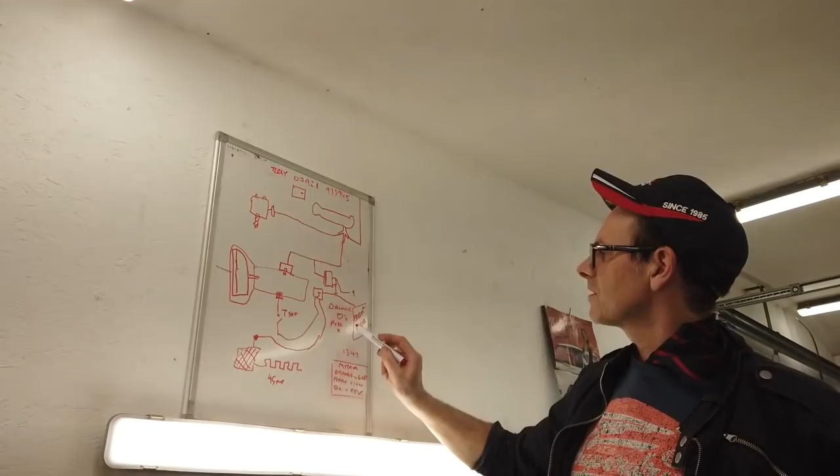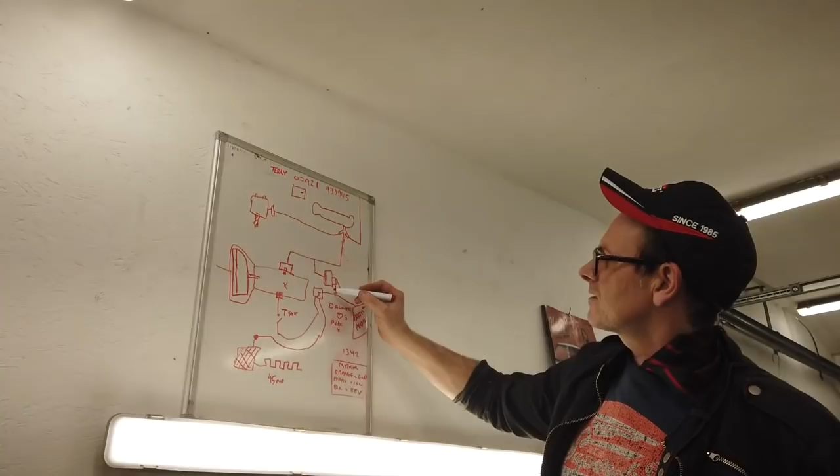So speed comes in first. It's got to get through the timer. If you're not telling the timer to come on, so your brake pedal's not down and the Vac is good, it gets through the time circuit. As long as you're in drive, it gets through the T-shifter and it makes it to the box. As soon as I put my foot on the pedal, it activates the time circuit for 10 seconds, so it breaks the contacts for 10 seconds.

That stops it. If I was to pulse my brake pedal, in theory I could be knocking the torque lock-up plates around and chattering them. So that 10-second delay means you can only chatter them in intervals of 10 seconds. If you really wanted to, you could go 10, 10, 10 on your torque converter lock-up plates. But you're not going to do that, and it stops the chattering. So that's it - that's how the lock-up circuit we did today works.

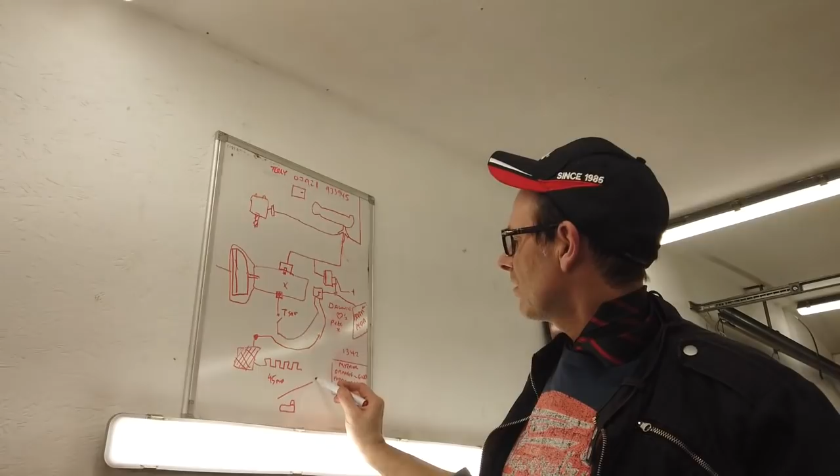So for some reason we got more power by moving that Vac Advance onto the Dizzy. I've no idea why. We also adjusted the kick down, which is a simple micro switch, just a little mini micro switch, and there's a lever on my accelerator pedal. That's the foot on the pedal. There's the pedal bar and the pivot point. It just touches a micro switch, and the micro switch just needed moving so that when the pedal comes down to about here, my fingers are now the carpet.

Sorry about this crude analogy. You want to crush a little bit of carpet and at exactly the same time hit the micro switch so you get a tactile feel of where your kick down is, rather than where I had it, which was almost at three-quarters and causing me all sorts of downshift problems and not very smooth power delivery because it was surging. You'll hear that on some of the earlier videos - you can hear me quickly come off the gas when I realised what was going on.

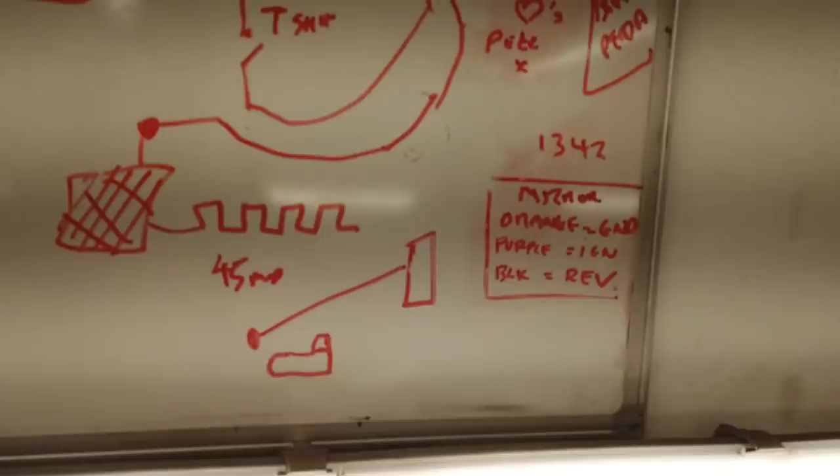I'll show you up close. We're going to flip the screen now. Hold on, you'll see my ugly mug for a sec. Back round we go. So that was the layout.

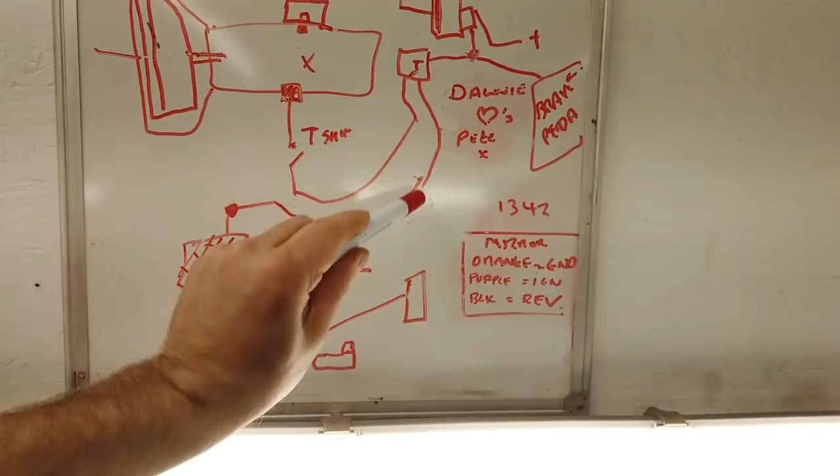Gearbox here, torque converter there, lock-up plates are contained within. The solenoid that controls the lock-up plates has to get through the T-shifter, has to get through that timer. It has to be told to come on from the 45 mph signal. Once all that's correct, lock-up begins.

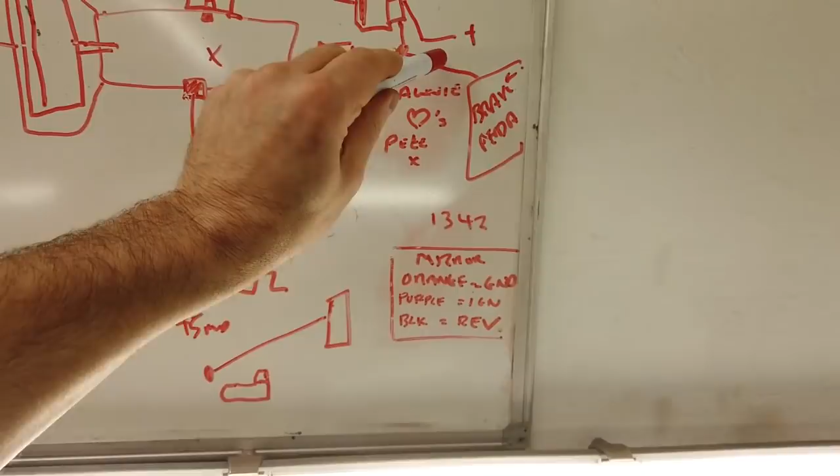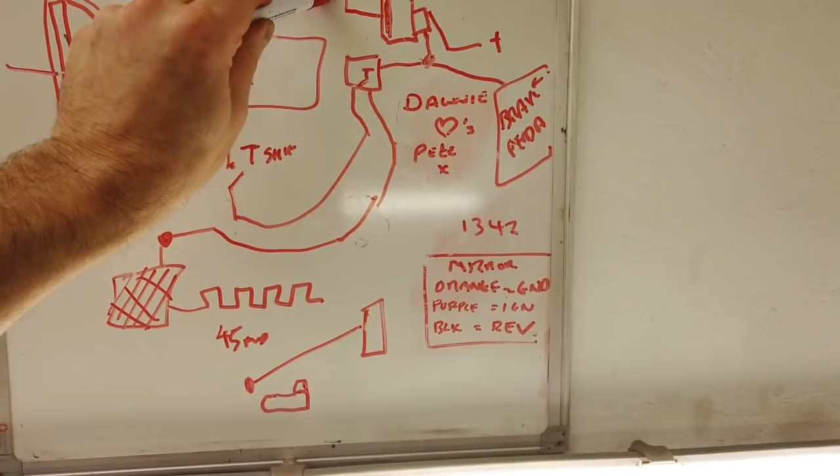Hit your brake pedal, it supplies a positive feed to a timer circuit which breaks these contacts, stopping this lock-up signal from making it through. So the timer is a bit of an interrupt. Vac switch fires up, also activates the timer if the vac is too low. Only when the vac returns to a better pressure, around 10 HGs, does it press the switch in with the plate, or release the switch - it's wired the other way around. It disables the timer, and after 10 seconds the timer then makes contacts again and the lock-up comes back in.

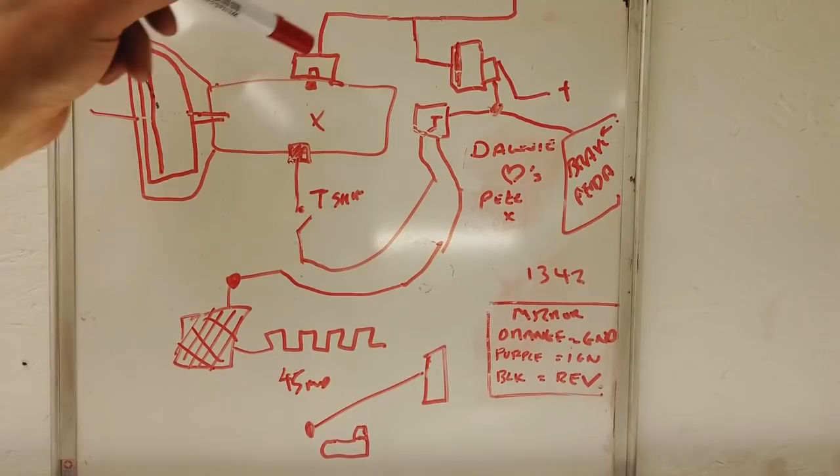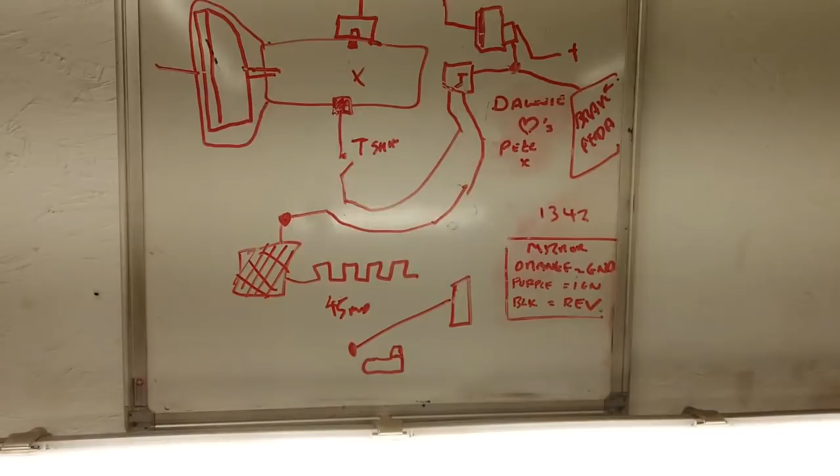So you can't make it chatter by just rocking the vac signal on your pedal. This doesn't chatter for at least 10 seconds. That could be 20 seconds if you wanted. Best anything over 10 though, and not really more than 20, because otherwise you want your lock-up coming back in as soon as you're ready to cruise, you see.

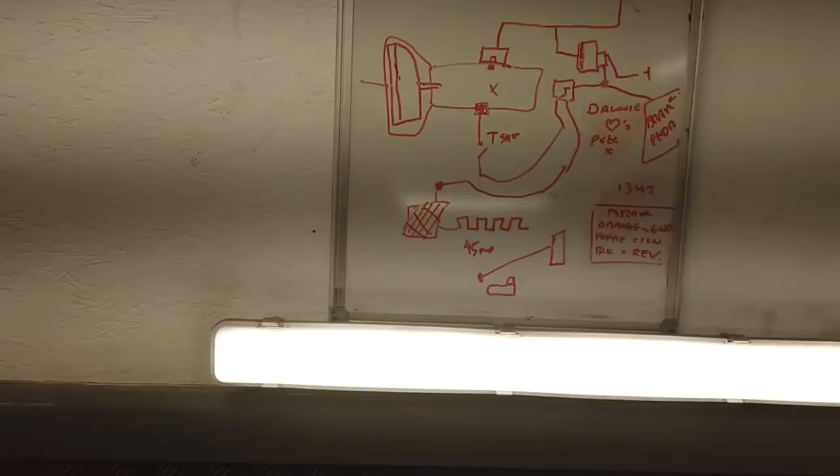So that was it. I'm just never going to know about this and why we got extra power out of it. I'm just never going to know. But on that note, I shall leave you now. Sorry about the bars you can see scrolling on the screen.

That's to do with the hertz rate of the LEDs and the cameras. You can get the camera frame rate to sort of sync it out, but with some jobs on the board up here which I've been working my way through - Ruby needs the rear window chrome redoing, and a speed switch wants doing on Ruby, so we will need to apply the same formula with this truth table for the Vac switch.

Ruby hasn't got the vac switch on his lockup either, because his lockup comes in with the cruise control, which isn't always good because I don't always use the cruise control, so I'm losing a lot of lockup opportunities. So Ruby needs to be retrofitted. That's what these jobs are for.

Bramble's had his oil change, mixture check, speaker output check, diff casing seal was all right, I can cross that off - it ain't leaking, that's gone. No medium wave on the radio, long wave is okay, so done about that.

Fuel tank sender leak - we've got a new fuel sender, so that needs fitting. The green one, engine bay, couple of touch-ups on the paint, fuel lines to change, coolant to flush, brake fluid to swap on Tina G.

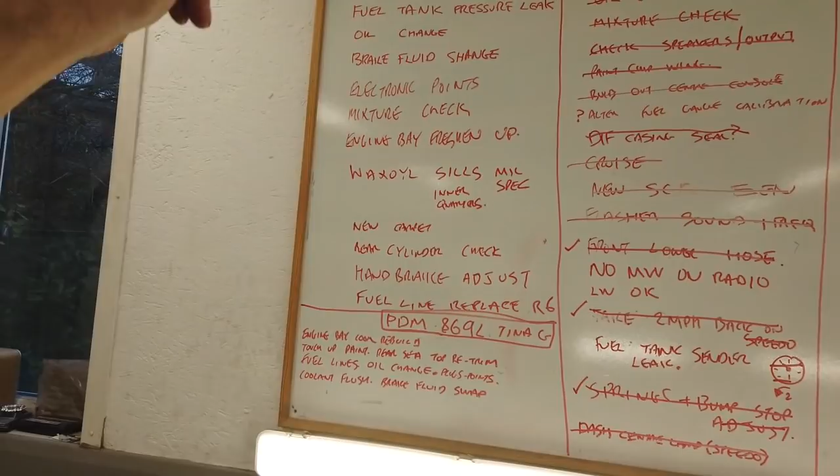And then Swampy's got fuel tank pressure leak. That'll be the rubber seal, because this is that bloody new petrol - it's wrecking everything. Oil change is due, brake fluid change is due. Needs electronic points, he's still on manual points. Check the mixture, freshen up the engine bay. Re-Waxoyl, because he's due now for a re-Waxoyl.

Carpet - I was going to get a new carpet from Australia. The carpet's good, but it's not the right type for that car. It's for Mark IV, it fits, but it's the wrong colour.

Rear cylinder check - rear cylinder check, don't know what that is. Don't know what I mean by that. Rear cylinder check, don't know. I have to try and remember. What was rear cylinder check? What did I mean by that?

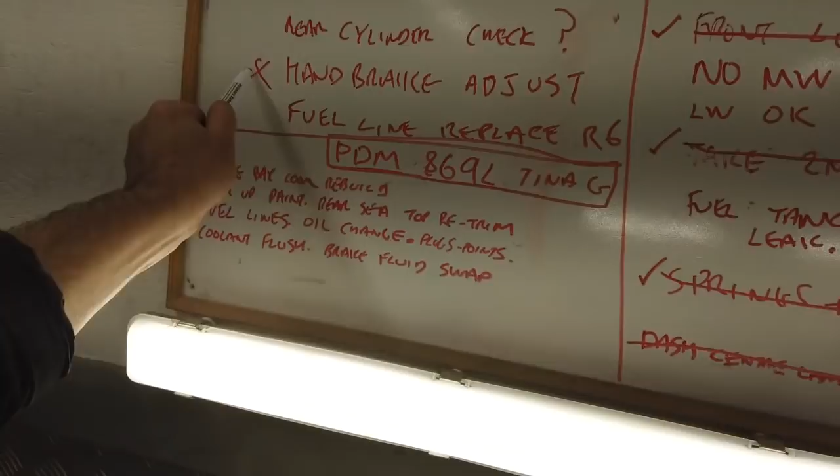Handbrake adjust, defo, that's an important one - the handbrake's really slack on it. Fuel line replaced with R6. So there's some of the jobs, but for now I'm gonna go.